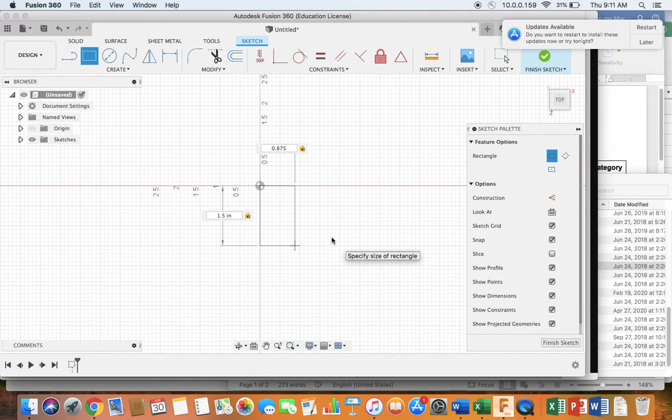Now I'm going to type in 1.5 inches for one dimension, tab, 0.875. Again, that's half of the 1.75, and then hit enter. I'm going to finish sketch. I'm going to zoom in, pan over, escape the pan. All right, now to extrude it up, I click on the rectangle, I click on the extrude

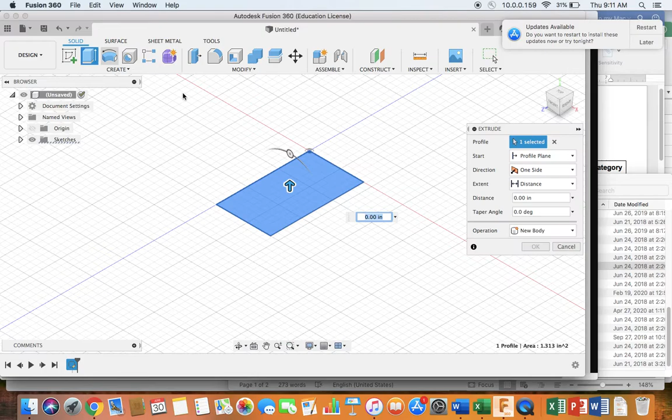tool, grab the arrow and drag up, but I need to specify exactly how far I'm extruding. So I click here where it says distance in the window and type in 0.25. Okay. All right, so now I have my half of my base. I'm now going to draw on this face, the front face. So I'm going to pan down so I can draw my next rectangle.

All right, so what is my next rectangle? It's this. I'm going to draw a vertical rectangle to create this half of this part. So this is 3 boxes wide. That would be 0.75 inches. Half of that is 0.375. So I'm drawing a rectangle that's 0.375 wide, and it goes all the way up to the top, or 1.5 inches.

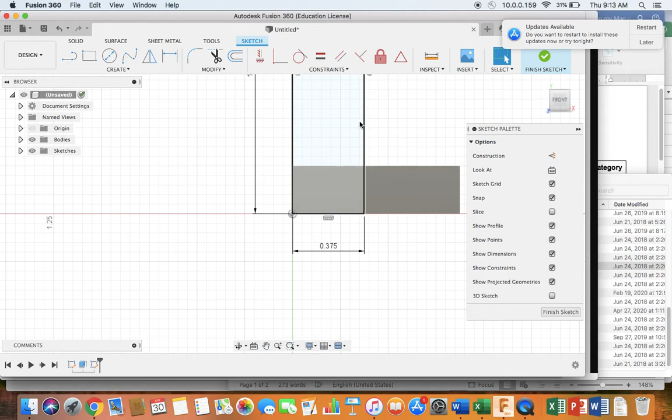So again, I right-click, sketch, 2-point rectangle. I start in that corner, and I'm going to drag. I need it 1.5 inches tall, 0.375 inches wide, and then enter. I finish sketch, pan, scroll out, escape the pan. Okay, so now if we were to look at it for 3D view, we're going to take this rectangle and we're going to extrude this way.

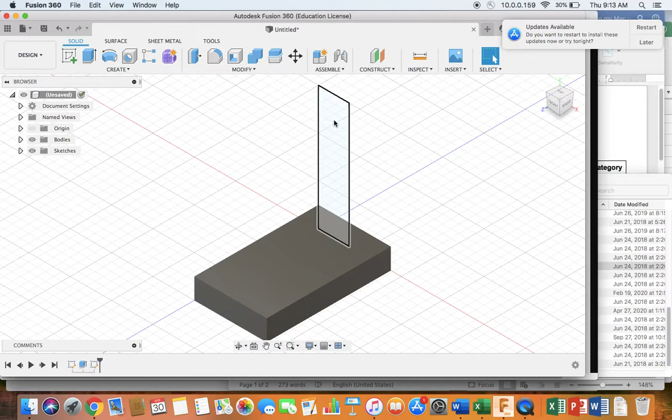So I click on the rectangle, I click on extrude, I grab my arrow. Now, often you can extrude to another side. Here is the extent, to an object, to a side, to a plane, or something like that. I don't know, because if this isn't coincident with this entire plane or face, maybe that won't work for me. So I'm just going to specify the distance that I'm extruding. It's 1.5 inches, the width of that. And I say OK.

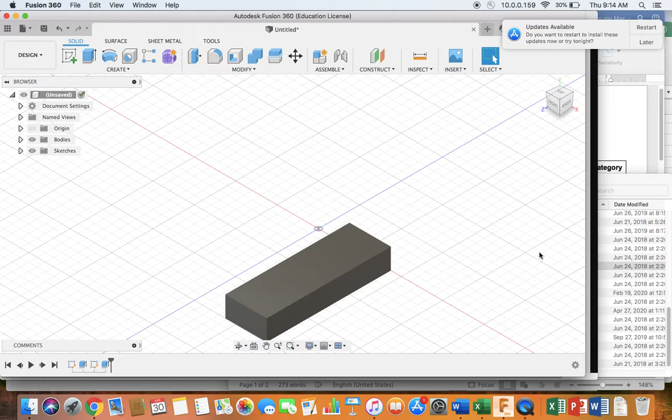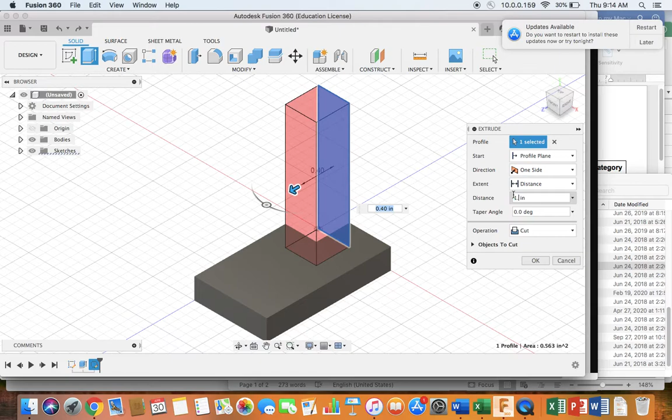Whoops, don't know what happened. So let's try that again. Click on the rectangle, click on extrude, pull this way, type in 1.5 inches. It's not a cut. It's a new body. Okay. All right, so now we have the two rectangular portions of this. Let's look at our object.

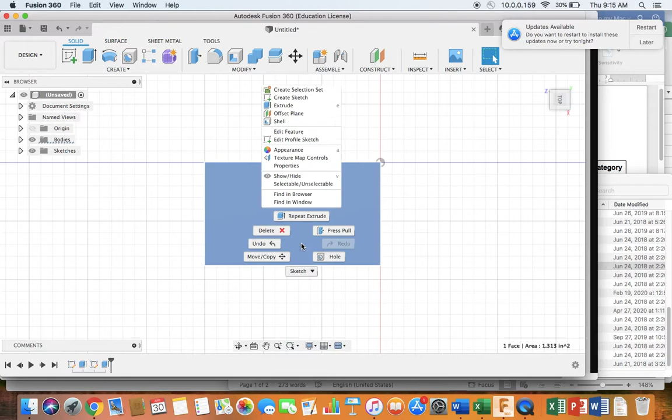So one thing we're going to do is we're going to extrude out this arc. So why don't we do that first? So I'm going to be drawing on this face. So why don't we get the top view? I'm going to right click, sketch, center diameter circle. I want the center to be at the center of this edge. So that would be at 0.75 or right there. So I click there.

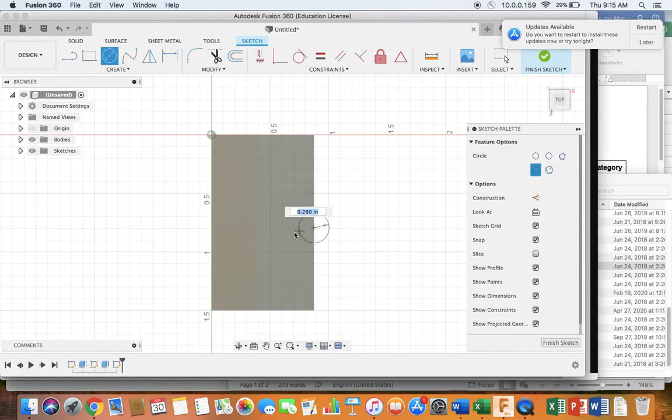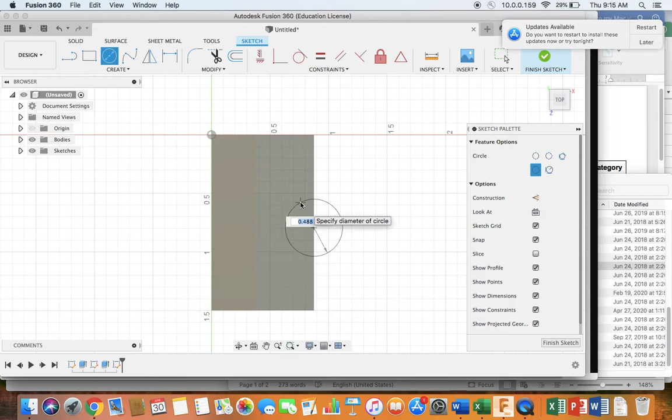My circle, I should have said this, is 3 boxes in diameter. There's 2 boxes there and then half a box on each side, so 3 full boxes. 3 times 0.25 is 0.75. So I need to type in 0.75, enter. I finish the sketch. And click on the little house. Now I'm going to extrude out this. So I click on this part only.

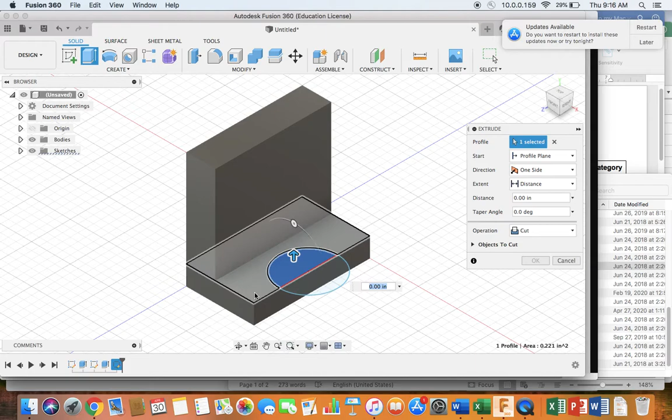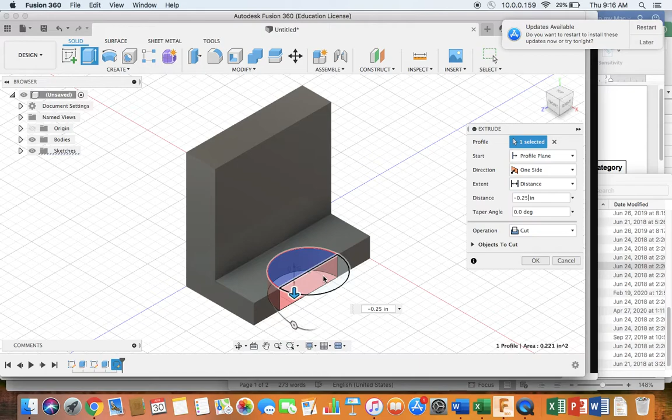Click on extrude. I want it to be a cut. And then remember this is point. See how the negative is there? This is a 0.25 inch thick piece. So again, some of the features here is I moved the arrow so it was going down. I clicked on cut and then typed in the exact dimension of the hole. All right.

So again, let's go back to our object. All right, so one thing now that we can use constraints with is creating this arc. Let's see how we can create the arc by using constraints.

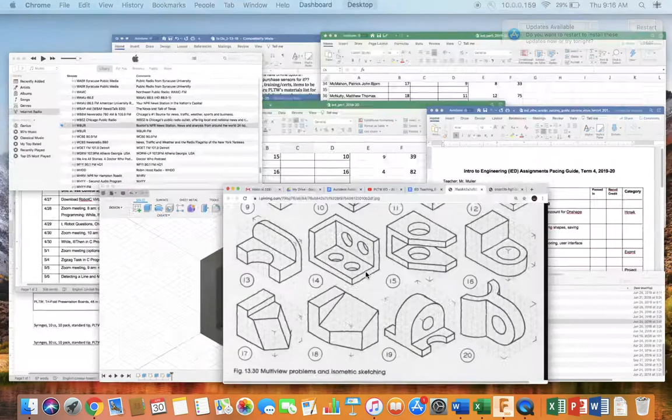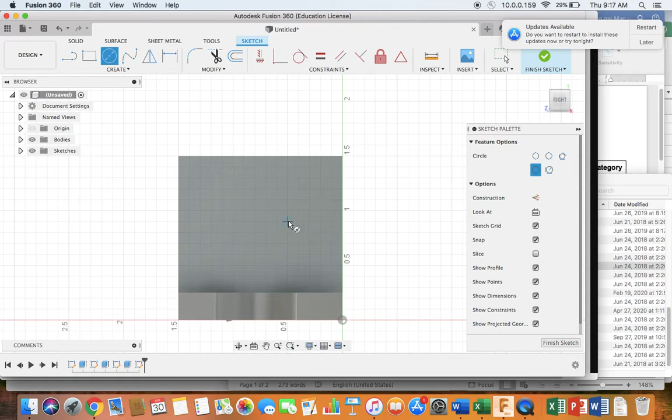So again, the arc will be on this face. So I'm going to click on this face, this right face. I'm going to right click, sketch, circle. So I'm just going to put the circle in a random place. All right, so now let's use the constraint up here.

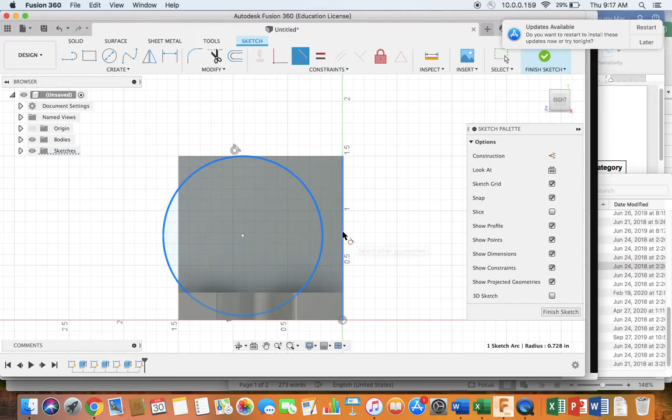We're going to use the tangent constraint numerous times. So let's click on the tangent constraint. I want this part of the circle to be tangent to this line here. I want this part of the circle to be tangent to this line. So again, what I'm doing is I'm clicking on the circle and I'm clicking on the edge of the part that I want it tangent to.

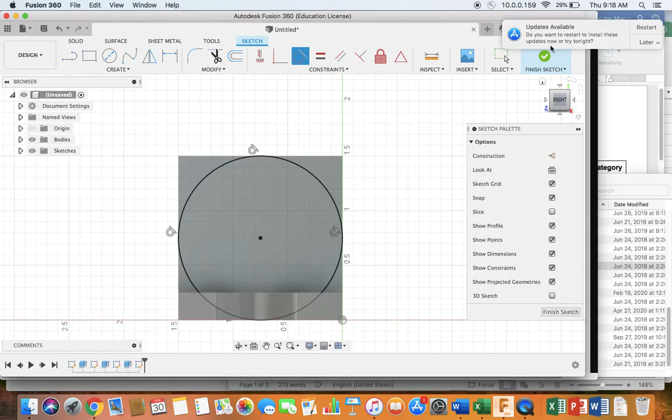And then last of all, I want this part of the circle tangent with this line. So again, I'm going to click on this and then this. All right, so now this circle is fully constrained within this space. Your drawings do need to be fully constrained. We'll talk more about constraints in one of the next videos. I want to finish the sketch now. I've made my circle. I'm now going to show a 3D view of it.

I'm going to now take out the parts that are up here of this solid material, of this rectangular material. So I click on one, I shift, click on the other. Now I click on extrude. I am going to do a cut. See, it tells me cut already, maybe because of pointing the arrow in that direction.

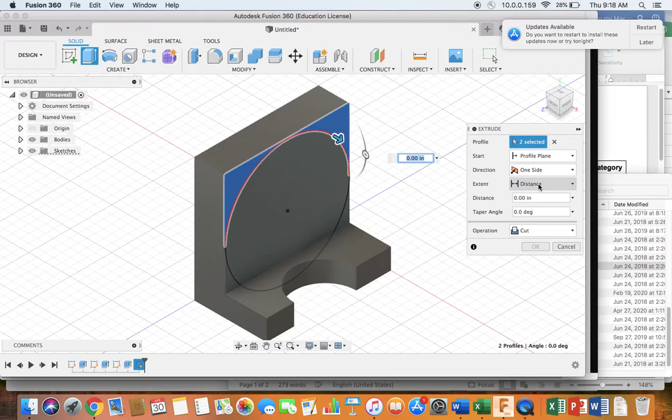This is 0.375, so I could type in 0.375 here. I could also put in, no, that didn't work. So let's use the distance. We'll do 0.375 and we'll do it in this direction. Notice there's a negative here that was just done for you by pulling on that arrow. All right, so now I've created an arc by extruding out those two corners.

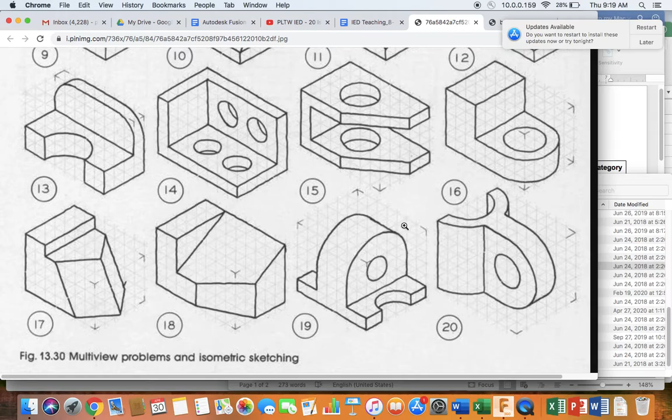All right, so now you can see what I have is, with the exception of the hole in the middle here, I have half of this. So now we're going to use the mirror command to create the whole thing, with the exception of the hole. So the mirror command is in the create. It's down here, mirror. So what you need to do is tell it that you're mirroring a body. You have other options, faces, features, components. We're mirroring a body.

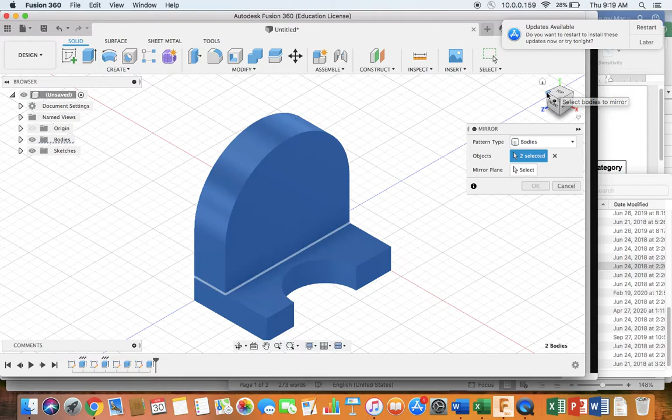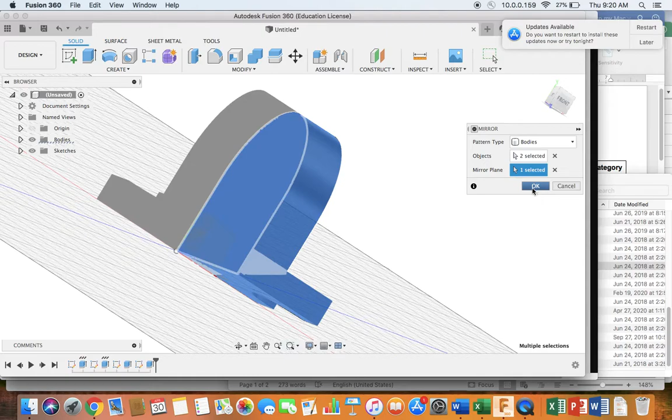You need to select which objects you're mirroring. So I'm going to mirror this, and then you need to tell it what plane you're mirroring across. So I'm going to grab this and rotate it so we can see the face that we want to mirror across. We're going to mirror across this face here. So I click in there to tell it which plane I'm mirroring, and then I'm clicking on the plane, and it mirrored right away. I click OK, click on the house, and now I have my mirrored object.

All right, just a few things. If you want to show dimensions, you have to click on a sketch. I can expand the number of the sketches that I have by clicking on this arrow. I can choose a sketch by left clicking, I can right click on the sketch, and I get this window of choices like show dimension.

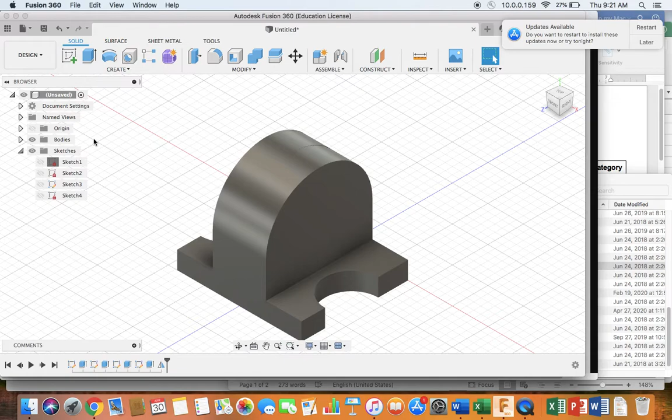All right, one last thing. You need to show your finished product to me. By the way, you do not need to show me dimensions. I've learned that the dimensions will disappear once you've saved it. So to share it with me, click on Show Data Panel. It's again that waffle in the upper left corner. I would save first.

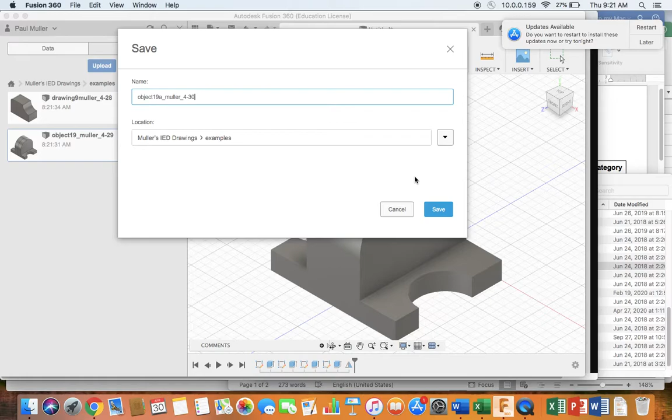Again, try to use something like object number. Since I already did this once, I already have an object 19, so I'm just going to call it object 19A. I'm going to put my name in it, and then the date. Here is the location, so choose the folder before you get to this point, or click on this arrow to change the location. Hit save.

Okay, now to share it with me, you need to click on the object first, on this window that shows the object. Then go to People, and then type in the email address of the person you're inviting, and then click Invite.